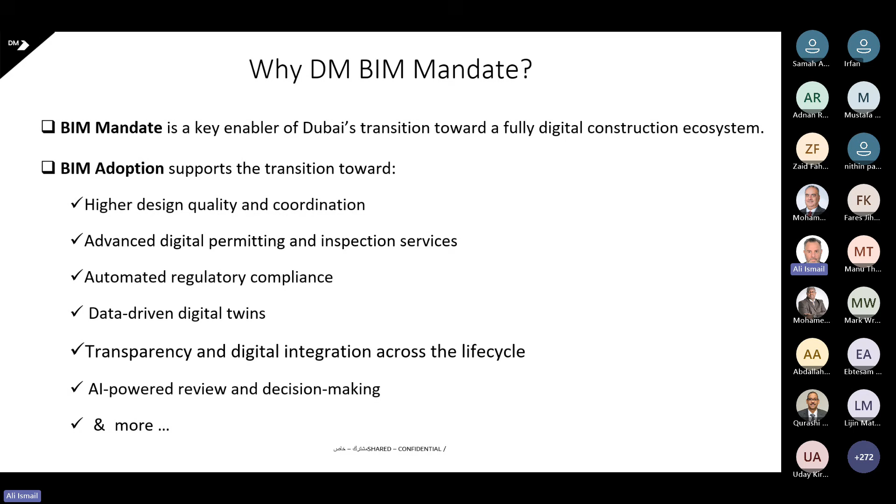And for sure, BIM and working with digital models improve transparency, especially if you are working with open BIM where there's no lock-in for the data, and digital integration in general across the whole life cycle of the project. AI needs good structured data, and to use AI to its maximum potential, BIM with structured data models compliant with BIM standards will feed any AI application in the future and improve our services more and more.

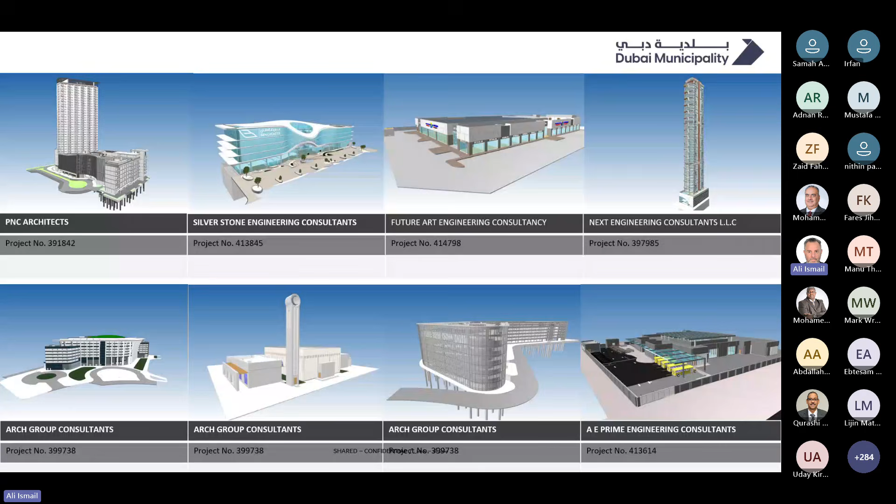So this is another screenshot of a real project submitted to Dubai Municipality, not just a sample model. We thank all the consultants whose names show on the screen for submitting successfully to Dubai Municipality.

So this was the first part from my side. Now I would like to hand over to Engineer Hadil or Engineer Sireen to talk more about the Dubai Municipality mandate and the permitting process. Engineers, let me know if you need to share from your side, or I can change the slide from mine.

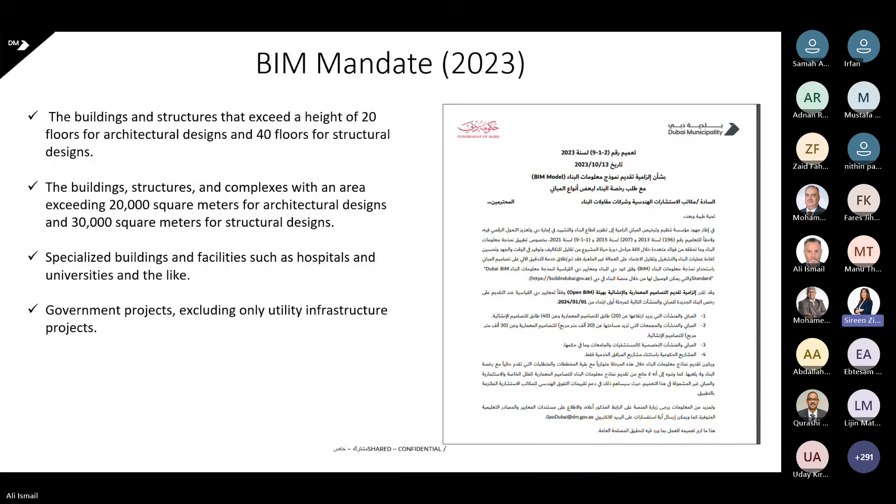Second one is buildings and structures with an area exceeding 20,000 square meters for architectural designs and 30,000 for structural designs. Specialized buildings like schools, shopping malls, hospitals, etc. And government projects, excluding only utility infrastructure projects like substations, these kinds of buildings. Can you move, Dr. Ali, please?

Now, 2 years later, after the BIM mandate has been applied, the second mandate came into being at the beginning of 2026. I'm going to explain what's new about this mandate. The first mandate was merely for new buildings; it did not cover modification applications. Now, this new one, we have made some modifications.

For new buildings, facilities and complexes higher than ground plus 12 floors, the mandate is now applied. It was ground plus 20, now it's becoming ground plus 12. And as far as area is concerned, previously it was above 20,000 square meters, now it's above 15,000 square meters. That is for new buildings.

Now for additions and major modifications, which applies only to BIM permitted buildings - if your building is not BIM permitted, this will not cover it. If it is a BIM permitted building, then if you do any modification from these 5 categories: adding or removing floors, increasing area by 1,500 square meters or more, complete design change, change of main building usage, and change of building location within the plot - then you have to submit the updated BIM model.

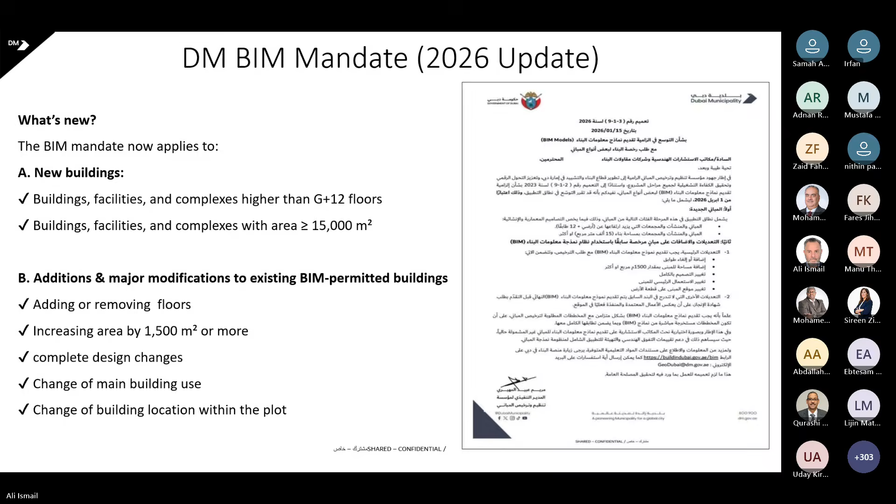Dr. Ali, can we proceed? Now let's talk about your submissions. Once you submit your application, we'll see what the permitting process under the BIM mandate is and how it will work. Your 2D drawings will have no requirement change - you will still submit them as before, but your drawings must be consistent with the submitted BIM models. Once the application is submitted, the building permit system will automatically identify and require BIM model submission for these cases.

The ones I mentioned previously, which are for final new buildings - I'll repeat again: buildings higher than ground plus 12 floors, area more than 15,000 square meters, and governmental and specialized buildings. For major modifications, also for BIM permitted buildings, it will include adding or removing floors, increasing area by 1,500 square meters or more, complete design change, change of building main use, or changing the building location.

I hope you hear me better. Can you hear me well? Yes, I can hear you. Because some consultants mentioned that they cannot hear me. Maybe there are some noises, but it's okay.

Okay, for other modifications - let's say you got a building permit, a BIM permitted application, and now you will do some modification like structural modification, for instance. The system will not require your BIM model submission once you submit, but it will automatically create a condition to submit the final updated BIM model before the completion certificate. So after you take the final building as a BIM permit, maybe you will submit many modifications not listed under the 5 categories, like structural or mechanical modification - the system will not ask you to submit the BIM model for this.

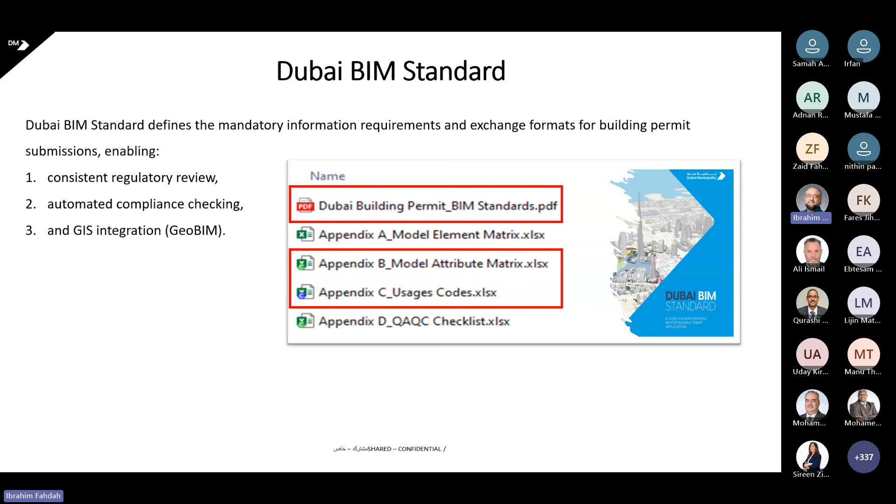So the key two appendices that you should refer to whenever you're working on submission are B and C. Keep this in mind when you're working on submission. I'll talk a bit more in detail about what these appendices are.

The master file, as I said, is the key document that you need to go through before you start working on any submission. It's made of two parts. Part one is a general introduction—what is the standard, why the standard is needed. The second part is the technical part.

So if you skip part one, at least you must go through part two, which covers the exchange information requirements—this is the technical part. It talks about the file format, the file size, the naming convention, etc. This part lays out the exchange information requirements and also refers to some supporting documents. So this is the master file to start with when you're reading or learning about the standard.

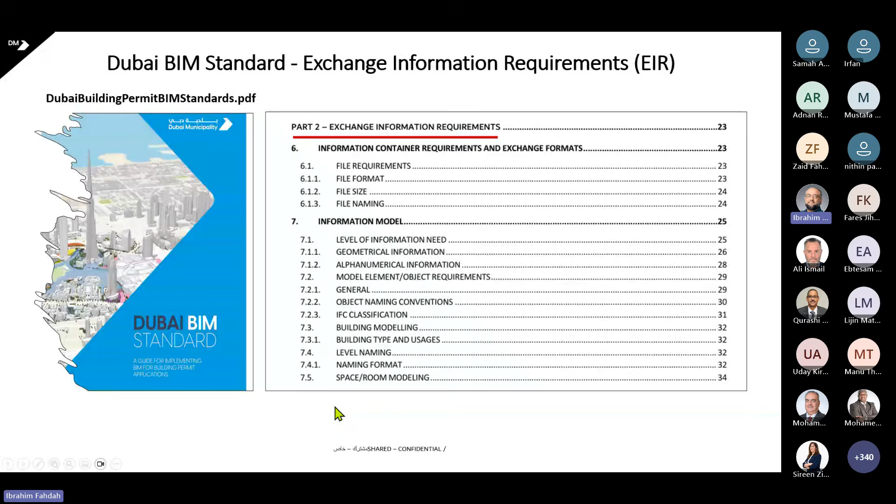Beside these master files, there are appendices from A to D, but in reality we find that most consultants work closely with Appendix B and C, because these two appendices define the information requirements. Both of them are Excel sheets.

Beside these elements—the list of elements—under each sheet or each element, we have a list of attributes or properties that should be included in the model. So whenever you're creating your BIM model, you need to fill in these details.

Now, we have Appendix C. It's complementary and mainly defines usage codes. Because when you create your model, the spaces, you need to specify usages, right? For building units and spaces.

For this, you can of course put plain English, but the machine doesn't like plain English because you can have a typo, or upper and lower case letters. This is why we have Appendix C that defines the codes—very strict codes to use for usages, building units and spaces. So whenever you want to define usages, you need to refer to Appendix C.

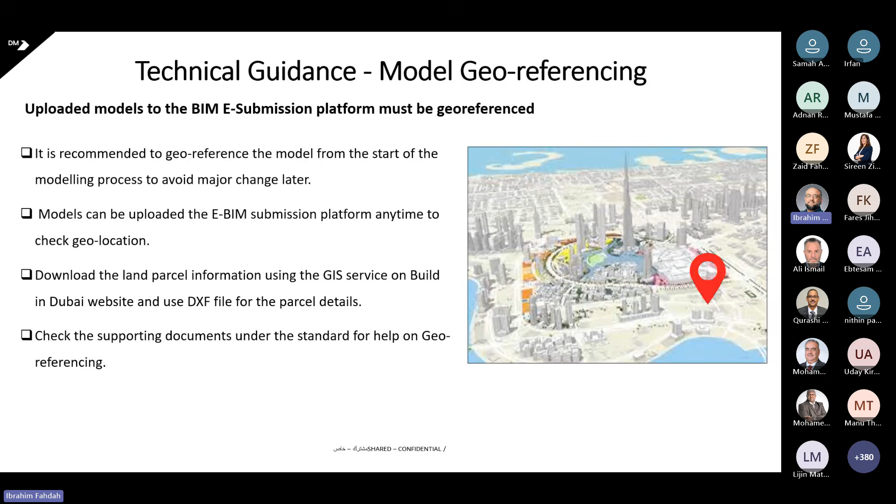Let's say you finish the steps and want to make sure it's okay. You can upload the model. If you export IFC, even if it's not complete yet and you haven't done any real modeling, you can upload the model as is to the eBIM platform, the Dubai platform, and check if the model is located within the boundary of your parcel ID or parcel boundary. This will assure you that your geolocation is correct.

Now let's say you've geolocated the model and you're okay. The modeling process starts. We know that a BIM model is not just geometry - it's geometry plus alphanumerical information. So I'll cover the two sides of requirements: the geometry side first, followed by the information requirements.

There are certain modeling styles not acceptable for submission. The most recommended practices for Dubai Municipality submission are largely based on universal recommendations. For example, you cannot have a wall from start to top as one piece - that's a quick example of recommended practices.

Ideally, you should follow the recommended modeling practices for geometrical features in the model. There are reasons behind this - following these steps makes life easier at our end and easier for the machine. It ensures better visualization; we can, for example, view the model story by story. It helps in the automation process, validation, and checking rules against the Dubai Building Code, and makes life easier for the engineers who review your model.

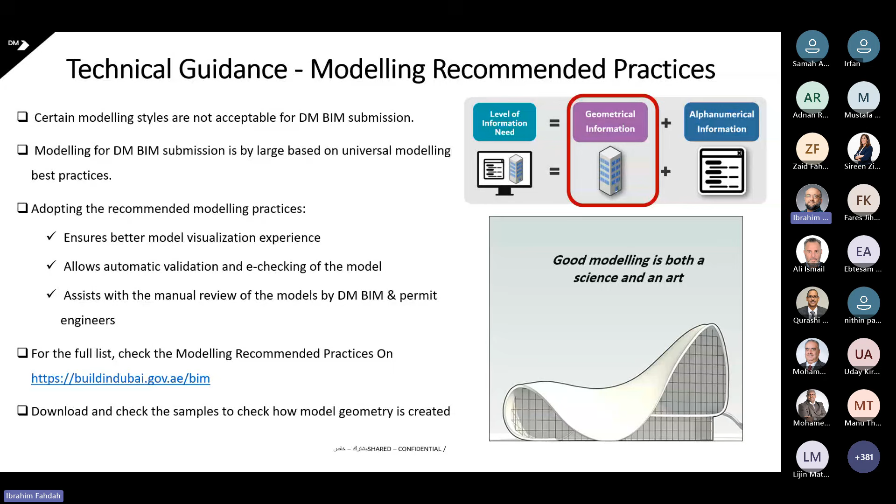These recommended practices are also documented in a file. You can find them on the Build in Dubai website, under /BIM, if you want to know the full list.

Just a quick example of these practices: like on the screen, you see a column on the left side modeled from bottom to top as one piece - that's refused, not accepted modeling. The right way is to model level by level. Again, this is like international universal recommended practice.

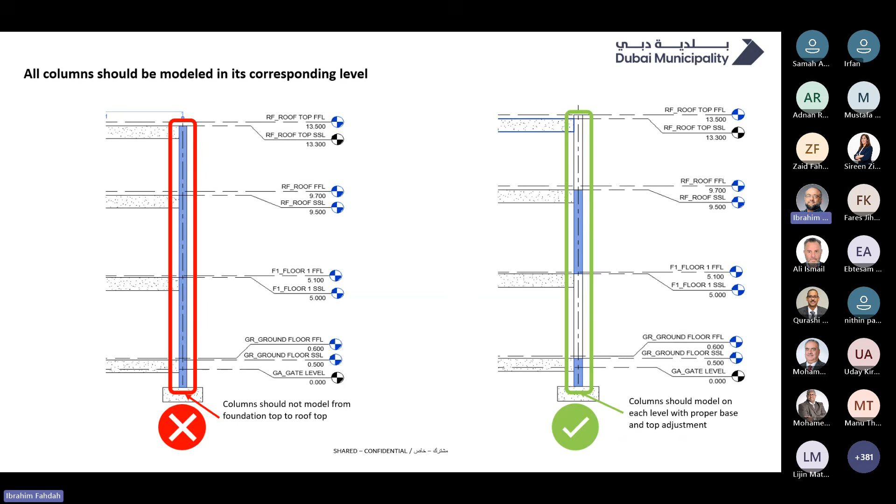Another example is the wall - if you see on the left side, it intersects with the slab. That is not accepted; ideally it's recommended to have it as on the right, from slab top to slab bottom. So that's how it should be, level by level.

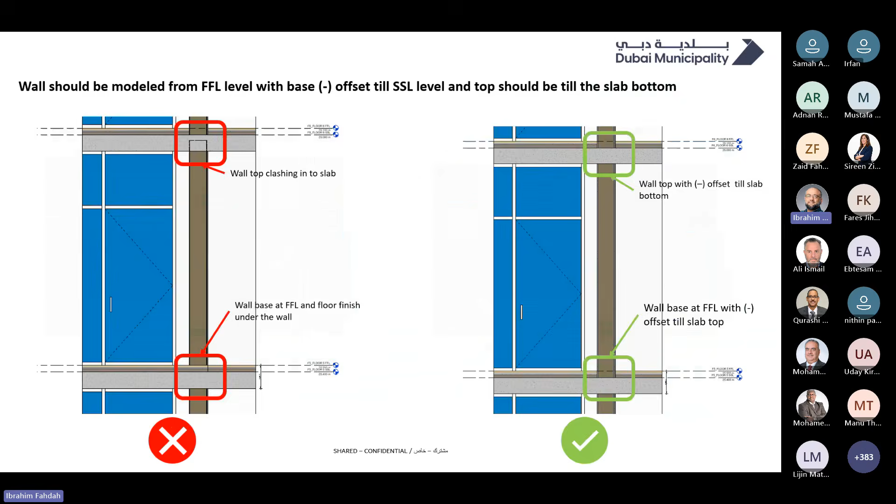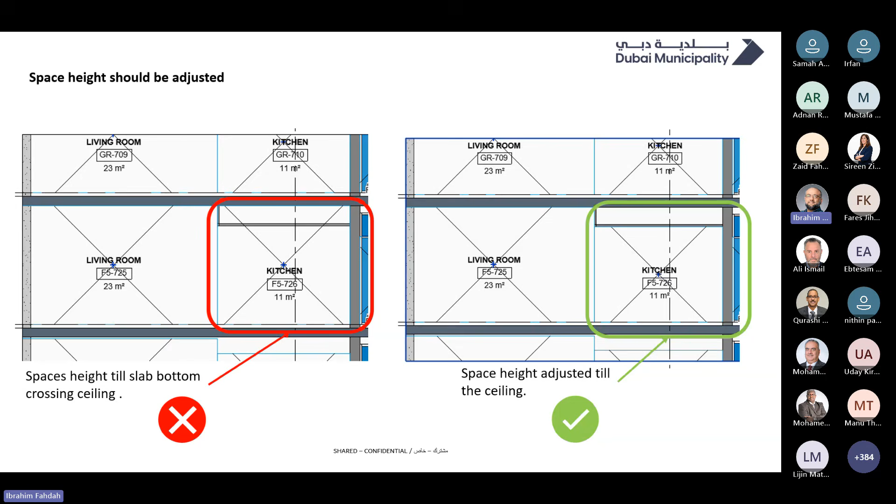For space height, for example, if you see on the left side, we have the space height crossing the ceiling - that's wrong modeling, it doesn't give the right height. But on the right side, we have the height modeled correctly under the ceiling. So that's the geometric modeling information - we recommend you follow these steps.

Now the second part of modeling that many consultants aren't used to is filling in information for their geometrical elements. We know that a BIM model is not just a 3D model. For that reason, there is a second requirement from the BIM standard, which is alphanumerical information - information that we add to the geometric elements or BIM elements.

What is required, you can find in Appendix B - what elements you need to supply information for and what information attributes and properties you need to supply all exists in Appendix B. So you can always consult that appendix, and as I said, you need to fill in the details for key elements like spaces, slabs, walls, etc.

Now, I already said why we need information - whenever you add information to the BIM model, that enriches it to support many use cases for automation, like generating building cards, working out total build-up area, total parking slots, etc. It also helps in checking space rules from Dubai Building Code - based on the space usage you tell us about using usage codes, we can identify what a space is used for, and automatically check the rules. When I say 'we,' I mean the machine automatically checking these rules. We can also cross-reference against some of your manual inputs in the system.

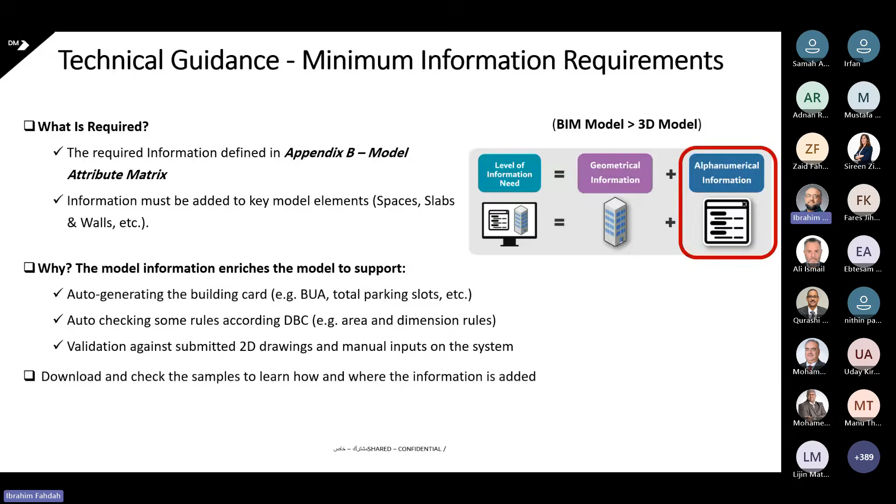So now let's say you've done your modeling, geometry okay, information okay, and now you have a large model. We know some projects are very complex, made of multiple buildings, and some buildings are made of multiple parts. For this reason, you don't have to worry - you can split your models into multiple IFC files. The naming convention is provided for you if you submit multiple files, so there's no problem with that.

But you need to keep a few things in mind. All submissions have to be in a single zip file containing all the IFC files. No mixing elements between files - architectural files should include only architectural elements, structural only structural elements. No duplicates. Each IFC file should belong to a building or part of a building. For example, a building with 3 parts could be 3 IFC files for each discipline, so in total maybe 6.

Cladding and landscape - because it's complex to split by story - we allow that to be in a single file. Finally, for naming convention, always refer to the documentation for the correct naming convention if you submit multiple files. So there's no problem with splitting your model if you have a large project.

Now, saying everything is okay so far, the last step is the IFC export. This should be completed correctly. Many consultants, in the early days of BIM submission, just submitted any IFC file. We recommend you read the documentation and follow the standard, correct process to submit the IFC file - using IFC 4 format, following the steps in the documentation.

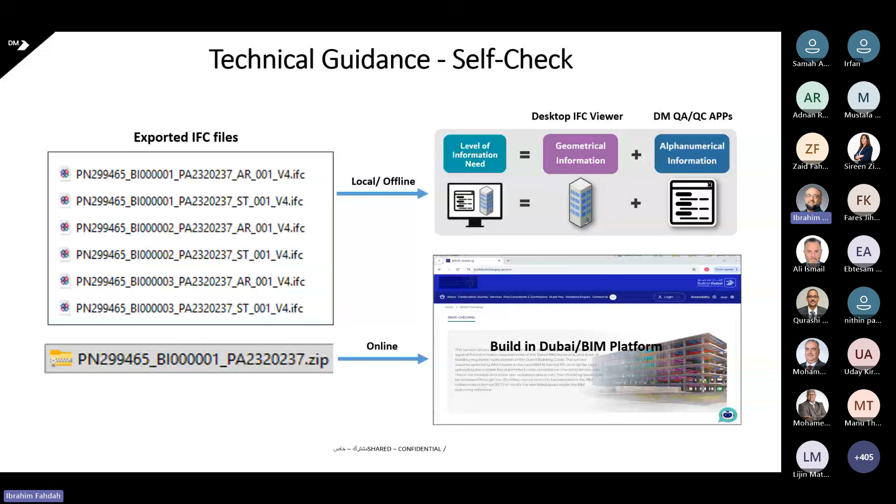Wrapping up my part now, assuming many attendees today may eventually need to submit under the new updated mandate. For this, we put together an action plan of things you need to do to meet the requirements.

First, understand the scope of the mandate and the process, download the standard and the sample, and get familiar with this material. It's not that complex once you know the requirements. Build some understanding of the IFC file, what IFC is, and there's plenty of material online about how to work with it in your BIM authoring tools. Learn about the recommended practices for modeling, and keep in mind adding information to the model.

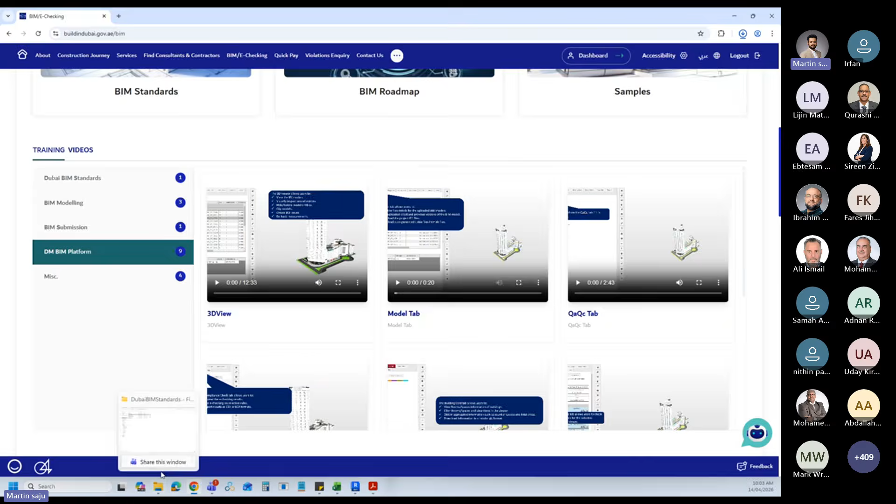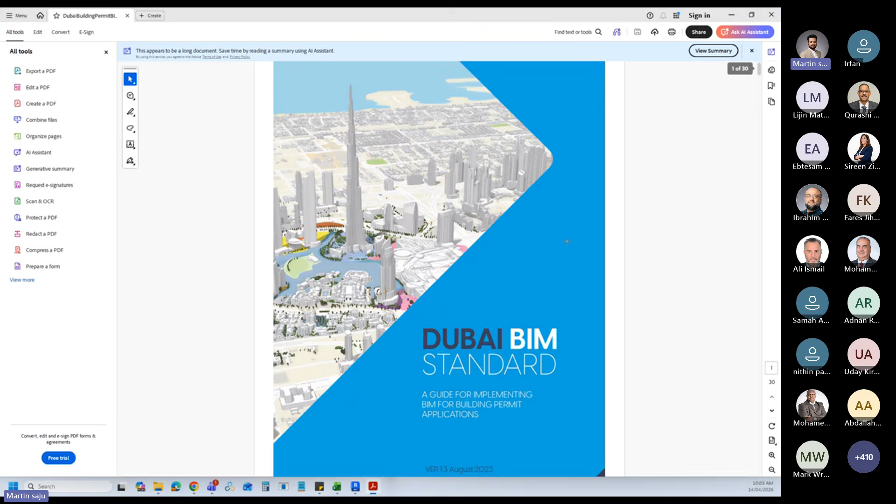If I unzip it, you'll see a couple of subfolders and PDF documents. If we go to the BIM standard folder and open this PDF file, this is the one Dr. Ibrahim was sharing earlier in his session. This document is basically a guideline for implementing BIM for your building permit application. As he said, it has two parts: Part one explains the basics about BIM, its terminologies and other information as per ISO 19650.

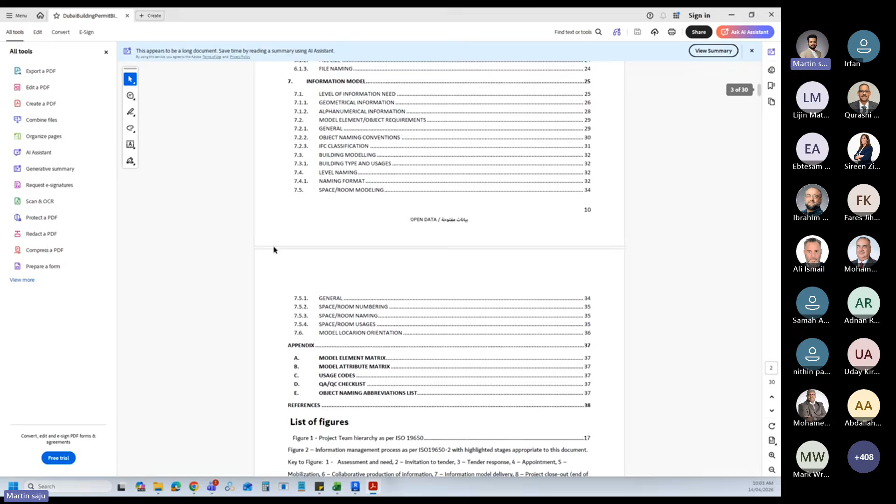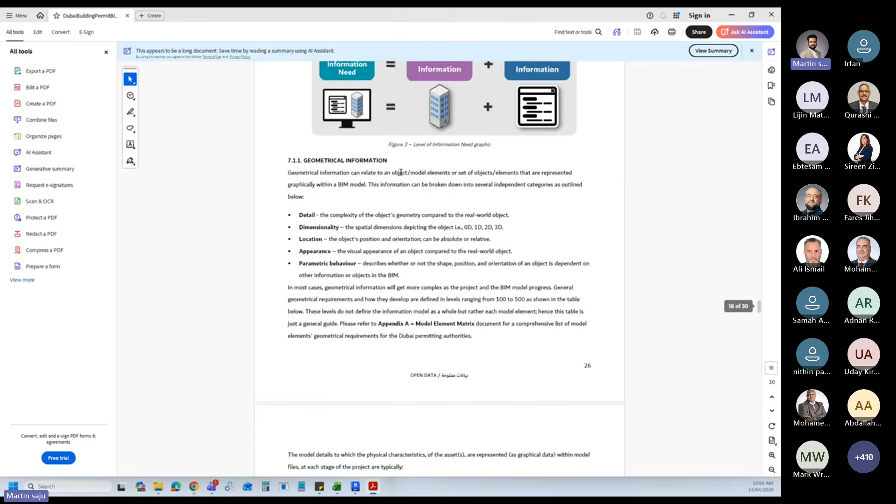What's important for us is part two. It explains the different information requirements - the file formats, file size, file naming you need to follow, and the level of information required, which includes, as Dr. Ibrahim mentioned, geometrical and alphanumerical information. Going through this document, you'll understand what information is required, what level of detail is needed, and what parameters or other data you need to refer to for a successful DM submission.

In the submission, something really important is the IFC classification. Every model element in your IFC file needs to be mapped to a proper IFC class, with the proper predefined type and an object type override if applicable. This information is available in Appendix B, which is also inside the BIM standard folder.

If I open my Appendix B, this is how it looks. It has a lot of attributes required for every IFC class. As I mentioned, every model element needs to be mapped to a proper IFC class. For example, your door, when modeled, is mapped to an IFC door category. Your parking is mapped to IFC space with predefined type parking.

And if you look at an example of rooms, rooms are exported as IFC spaces. Okay, and these are the lists. So there are a lot of other tabs here in this particular Excel file.

You can download and refer to this Appendix B model attribute matrix. So if you refer, for example, I'm taking the reference of rooms. Can you maximize the window, the Excel window, please? Thank you. Yes, so rooms are exported as IFC.

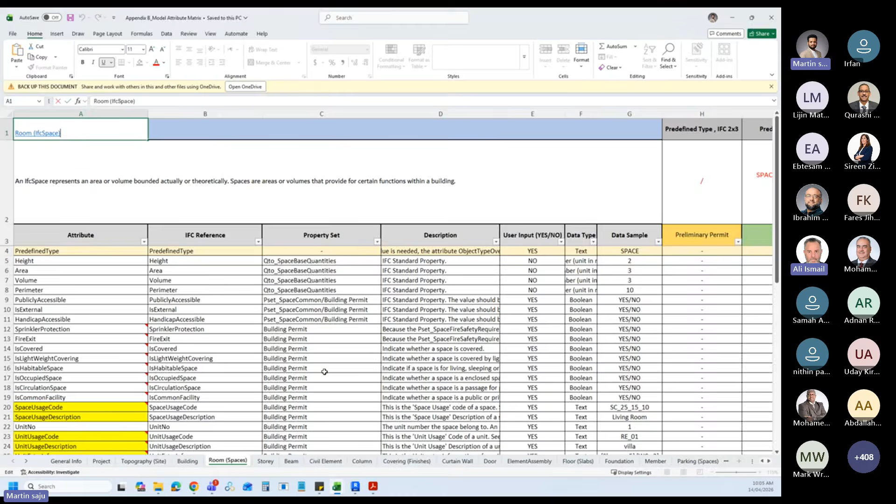Just to increase the font a little bit to make it more readable. Thank you. So rooms are exported as IFC spaces, and these are all the attributes that require information or data when you are working with rooms.

So when you scroll down, you will notice something called codes and descriptions. This was mentioned earlier. These are the codes which have been developed with local codes to identify the type of the building, the usage of the building, and the usage of the various rooms that you provide. So this data about the codes is available in Appendix C, which is also available inside the BIM standards folder.

So if you see this one, Appendix C usage codes. So if you open Appendix C, it will look like this. It has multiple sheets, multiple tabs, and it has the list of all the information, all the codes that is required for the building usages and also the space usages.

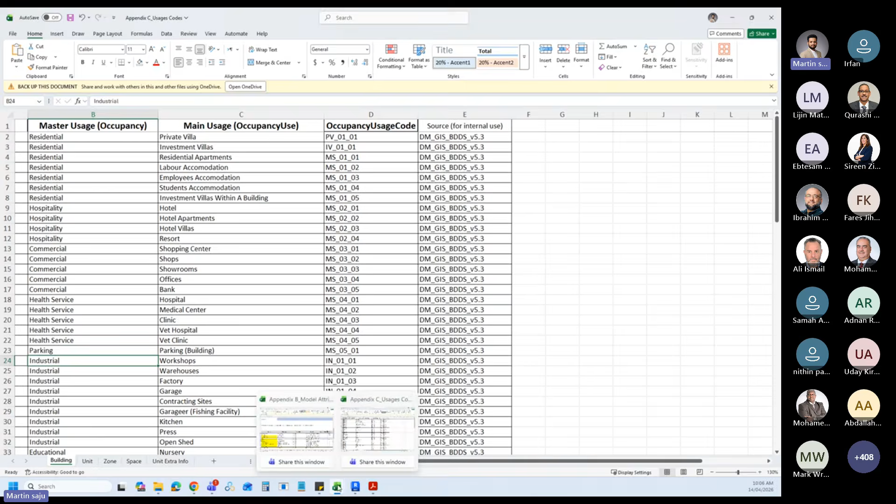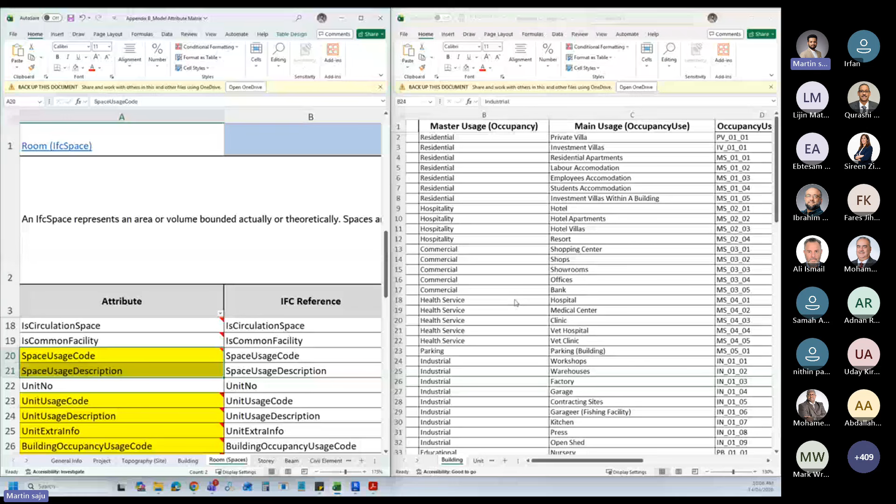If I may open my Appendix B and Appendix C side by side, I assume the font is still fine. So here, this one is the space usage code. And if you want to get an idea about the space usage code, you need to come to your Appendix C and switch to the spaces sheet. Then you will see this one is your space usage description and this one is your space usage code.

Also, if you scroll down in your Appendix B, I'm at my Appendix B right now, you will see there's something called the unit usage code and unit usage description, additionally building usage code and description. So if you want information about units, you switch to your unit sheet and you could find your unit usage code and your unit usage description in Appendix C.

Same is the case for building occupancy usage and zone. You have a tab here for zone where you get the information for your zone object type and also for your zone code. So this is a basic understanding about Appendix B and Appendix C. I will show you in detail how these appendices work.

Okay, so now I've been mentioning different parameters or different attributes that need to be filled with information. So, Engineer Martin, if you allow me, just to ask for a favor for our consultants.

As you know, it is very difficult to build a comprehensive and complete classification for all kinds of space usages or zones. We are doing our best to extend this list to be more comprehensive. For example, if we are talking about schools, we don't have at the moment very specific usages like principal room or music room, etc. So that's why you have to find a higher level.

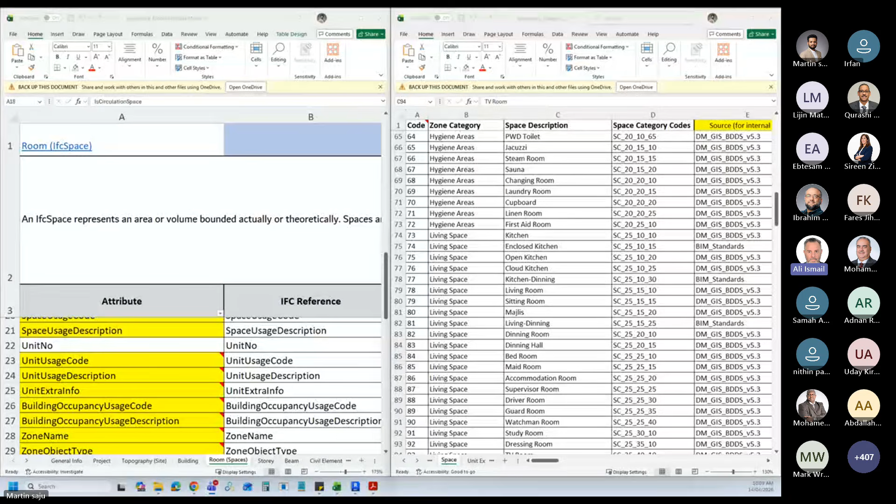Continue. Okay, so now we covered the important documents inside the BIM standard folder, which was this BIM standard PDF document and also Appendix B and Appendix C.

Now going back, you will be able to see another folder that says template guidelines, in which we have listed a couple of commonly used BIM authoring softwares. So for the time being, we are going to refer to the Revit BIM authoring software. So if you go to the Revit folder, you could see your Revit template. I saw a couple of messages in the chat asking for the template.

You can get the Revit template from this folder. Please note the Revit template developed by DM is currently in version 2019. So if any consultants are working in a higher version, you can easily upgrade this template and then continue working on it.

If your company already has an existing template, it is not mandatory that you use the DM standard template. You can use your own, which is completely fine, but you need to make sure you load this set of shared parameters. This is the shared parameter document we mentioned earlier. You need to load the shared parameters and make sure all the values are filled into all of the parameters.

Let me open the template. I have opened a sample file, and this is the landing page of the template. This sample file has been worked out in the DM template itself. Please note the sample files are in Revit version 2024, so if any consultants try to refer to the sample files in a lower version, it will be a little difficult. This is currently version 2024, and I'm opening a mixed use residential project as an example.

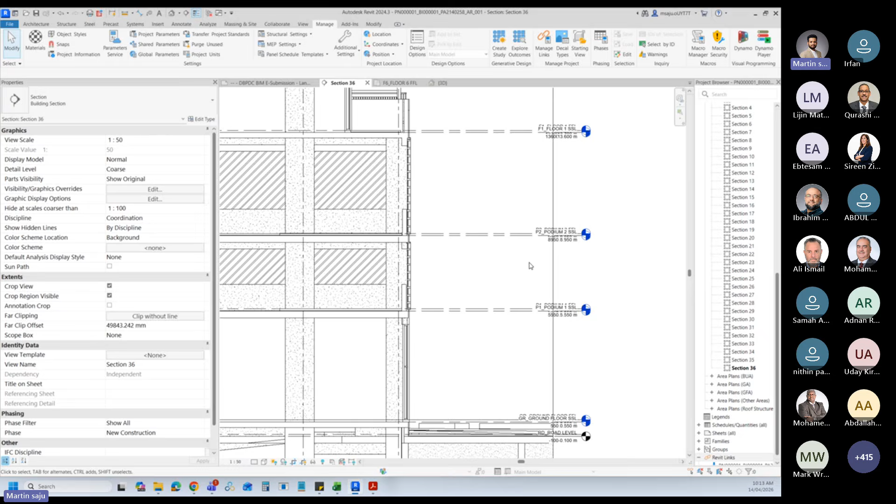Once you set up your levels with the correct naming convention, make sure they are correct. In case you need to provide a reference level or a dummy level for the sake of submission or to finish your modeling properly, you can absolutely use it, but make sure that you do not export your dummy level.

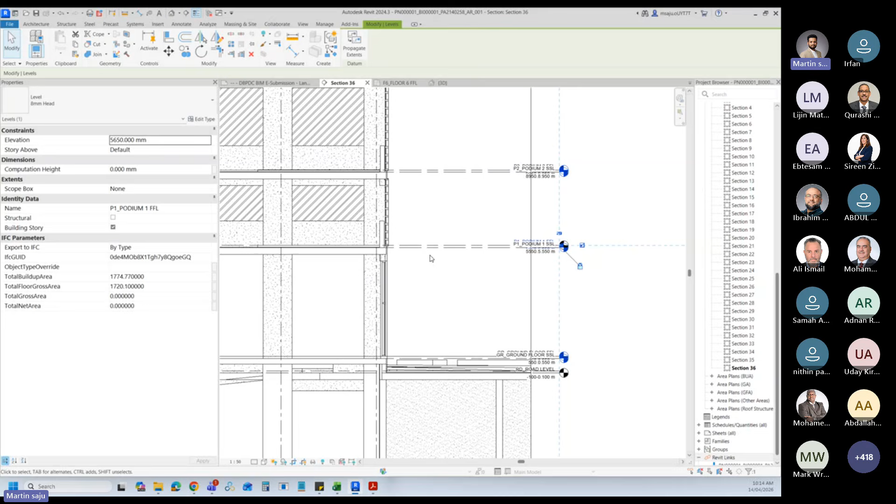What you can do is select your level, and there is a parameter called building story. Make sure you check off this checkbox so that this particular level is not exported. Since this is my architectural file, I don't need this level, so I check it off. No need to worry that the elements hosted to this level will be deleted or not exported — that is not the case. It will definitely be exported, but hosted to the level below it. That is something we need to make sure about the level naming convention.

So moving forward, once we are good with our levels, what we need to make sure is we set up the geolocation.

Setting up a file with the correct real world coordinates is really important. You need to make sure that your easting, northing, and elevation values are in the correct coordinates.

Imagine if you have different disciplines involved, like architecture, structure, ID, facade, and landscape, working in different Revit models. Please make sure all disciplines share the same shared coordinates. Also, regarding the gate level I mentioned earlier, please make sure there is a DMD value, like 00, for your gate level, and it should be equal to your DMD value. All disciplines or files need to follow the same DMD values.

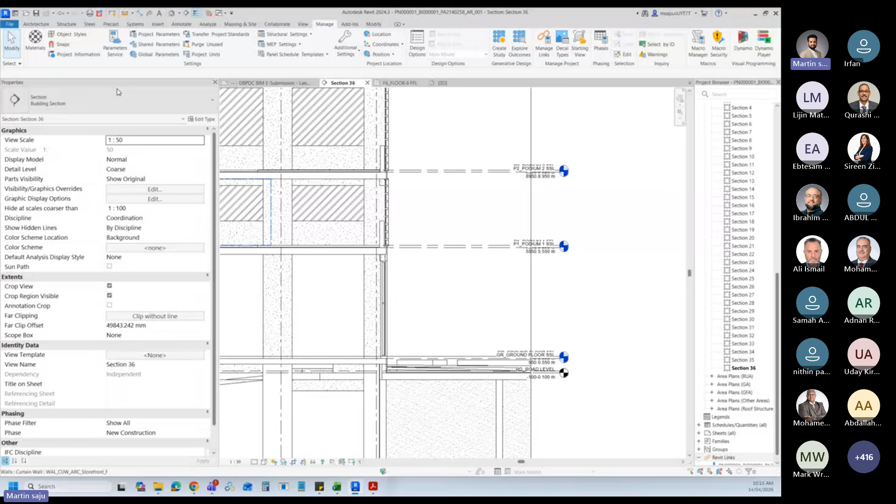Once we are good with all of this, we can start filling the information for our project, starting with the project information. I won't go deep into all the parameters, just a few that need to be highlighted. Let me open my Appendix C, which is a code, and look at occupancy usage code and occupancy use.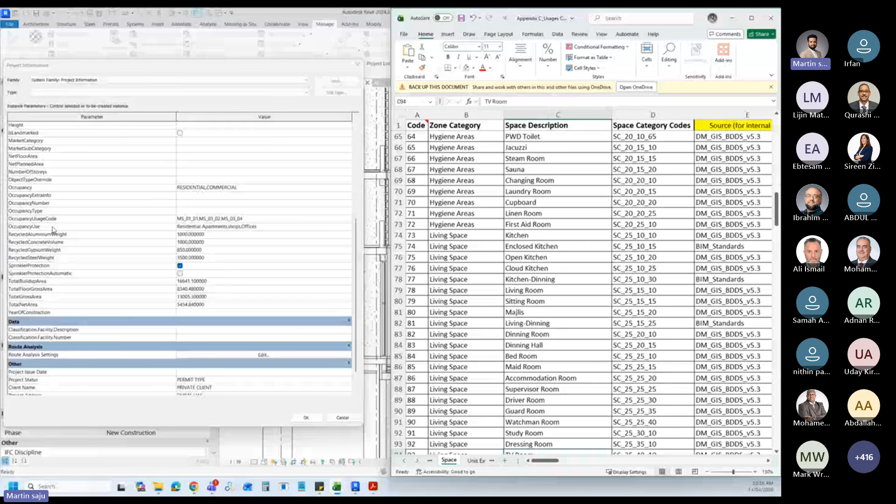For occupancy usage, you can switch to your buildings tab. Currently what I have opened is a mixed use residential project, so I have residential as well as commercial. My occupancy is residential and commercial, so you can mention both with a comma separator.

For the occupancy usage code, mine is a residential apartment, and this is my occupancy usage code. In commercial, I have shops and offices in this particular project, so I will mention residential apartments, comma shops, comma offices, with the same codes MS0101, MS0302, and 0304 mentioned in commas.

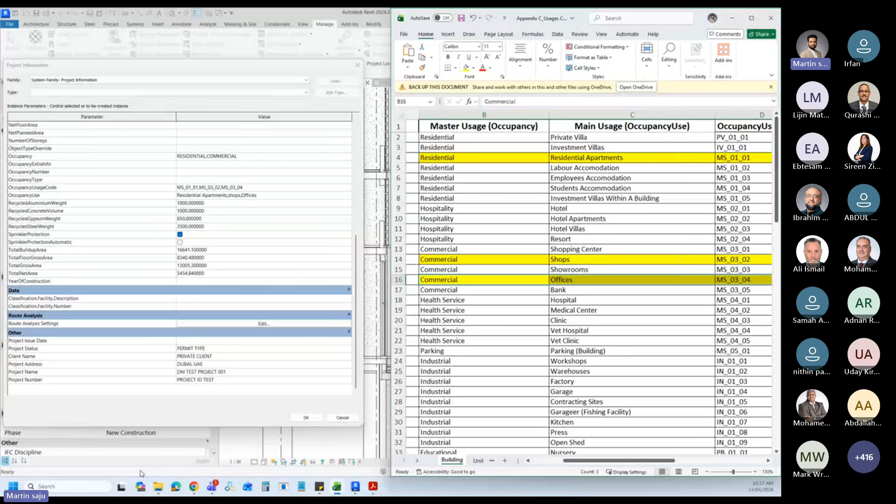It's really important that you fill the codes exactly like what we have in Appendix C into the project information. We also have a lot of other parameters to fill in, which you can easily identify by referring to Appendix B, the project tab, your site, and your building. These parameters go into your project information.

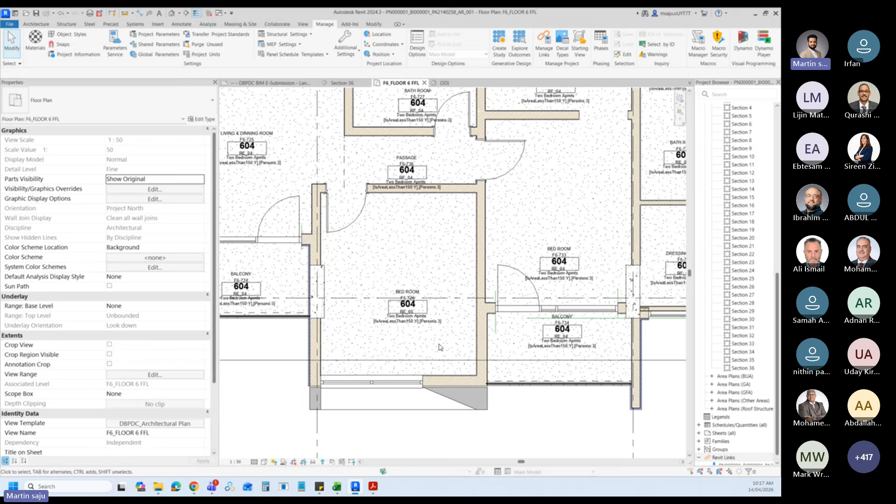Once we are good with the project information, next, for example, I'll only show one floor plan with filling the information for a space. You need to make sure you fill the IFC parameters for all model elements like walls, doors, windows, floors, beams, and everything. For instance, I'm taking the example of a room.

If I take this room, on the property palette you will be able to see, under identity data, the name of the room is as per the design intent. You can provide the name as per your design intent, which is absolutely fine, whether it be bedroom 1, bedroom 2, 3, 4, whatever it is.

We mentioned earlier that every model element needs to be exported to a particular IFC class. I mentioned rooms are exported as IFC spaces. So under export to IFC as, hit the three dots, and you'll get the IFC options. Search for space, select IFC space, the predefined type is space, hit OK, and then this part is done.

Then there's the building occupancy usage code and building occupancy usage description, which you can find in Appendix C that we discussed earlier. This room is currently part of my residential apartment, so I've used the code for residential apartment here. If this was an office, you should use the code for office, or if it was a retail, use the code for a shop.

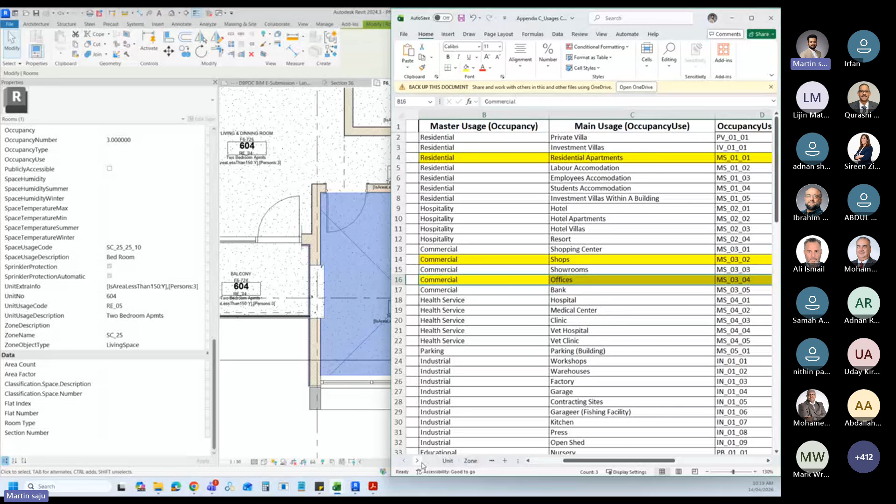And then if you scroll down, we have a set of codes for which you need to refer to your Appendix C. So if I go to Spaces Excel, this one is my Appendix C on my right side, and I have my parameter on my left side. So here first I need to fill the information regarding spaces.

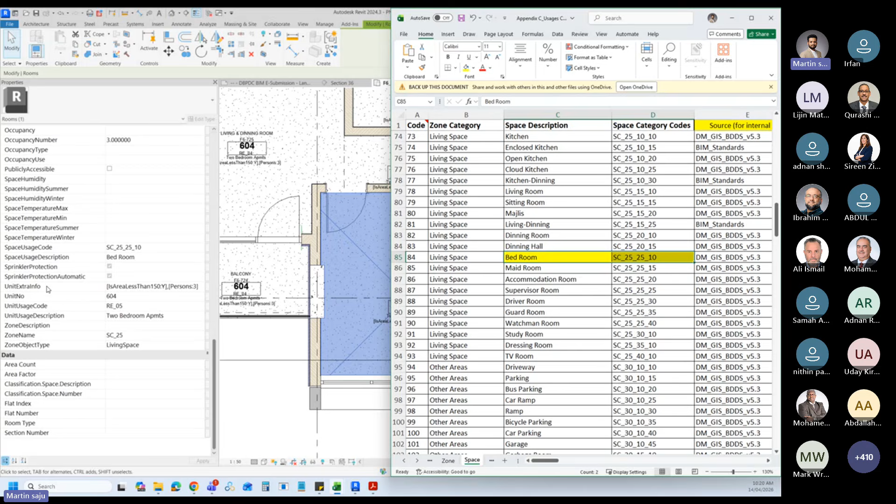So first one is my space usage code and description, which you can find here. Since it's a bedroom, it will be part of my living space. And if I check, this one is my code. So the description is bedroom, and this is my code, SC_25_25_10.

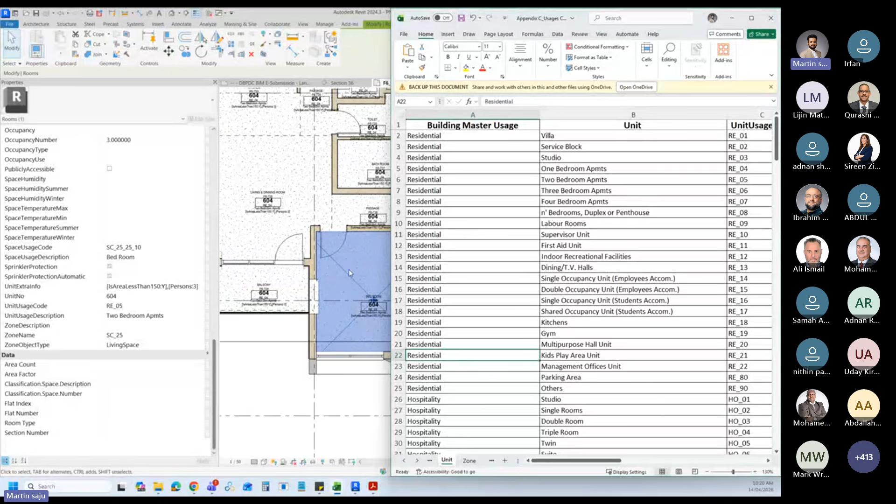Likewise, you need to fill the information for your unit, which is available in the unit sheet in Appendix C, which is this one. So while filling the units, you need to make sure that all of these are the different unit usages that we have mentioned in Appendix. So any of these comes in your project, you need to fill it. For instance, this one that I have selected right now, this room belongs to a 2-bedroom apartment. So this one is my unit usage. This is my unit usage code, and this is my unit usage extra info.

So if you see, just copy this one, 2-bedroom apartment, paste it here. Now the unit usage code is RE_05, paste it here. Okay, and that is how we fill the unit information.

So imagine it's not only for the apartment units. This one, you see the unit number - this is as per the design intent. So this one means it's the 4th apartment on the 6th floor, that's 604. Okay, so likewise, you need to provide unit information for all of the other units.

Like say, for example, if you have shops, if you have offices, if you have amenities, your amenities also need to provide units. For example, if you see here, you have a gym. If you have a gym, you need to provide unit information for your gym as well, your kids play area. And if you have any other rooms, you need to provide unit information for all of your units that you are providing in your project.

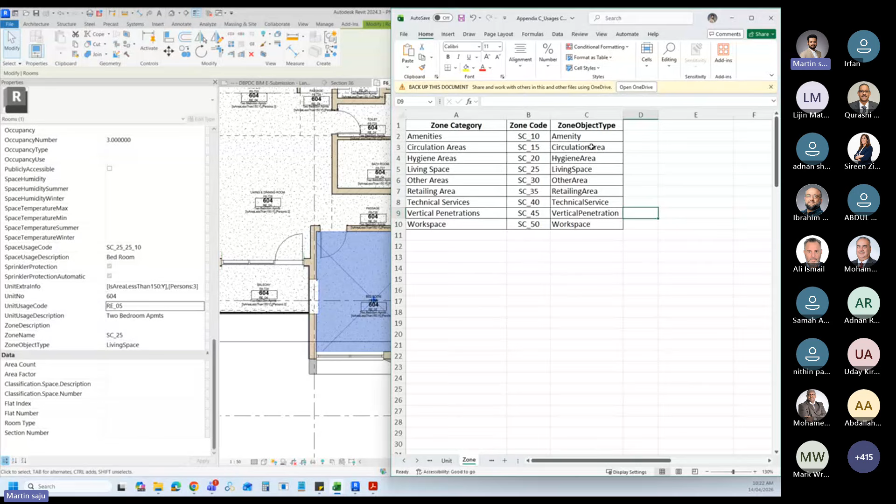Okay, then the zone is also the same way. You need to fill the information for your zone. If you switch to your zone tab, you could see the zone object type and also the zone code. So that is how we fill the information referring to Appendix C. And what information or what attributes need to be filled, you can refer to Appendix B. If you still need clarity, you can refer to the sample file that we have already worked out for understanding.

Okay, now once we are all good with the modeling - now I show only the example for the spaces. Like I mentioned earlier, you need to make sure that you fill all the attributes for all the model elements. Okay, so now when we are going to export, we are good to export now.

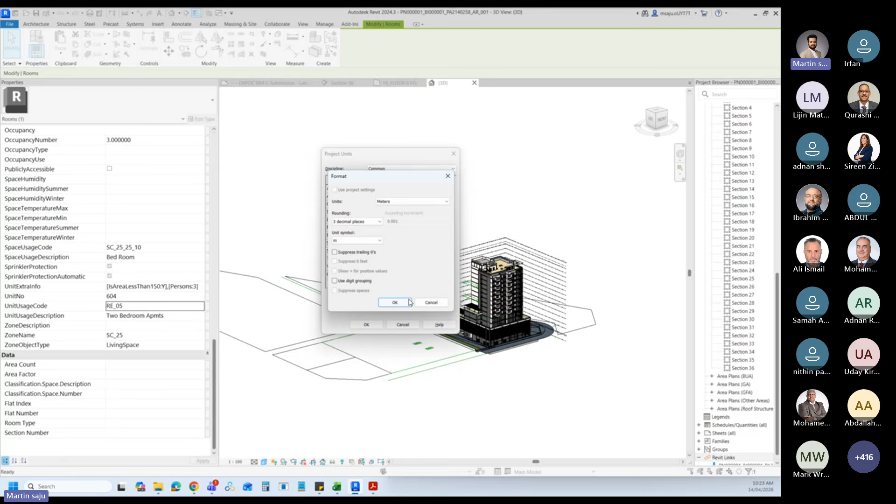I select a 3D view, and maybe you can set up a 3D view for export, which is up to you or as per your company policies or standards. Now, before you export your file to IFC, you need to make sure of one thing, that all the files need to be exported in unit meters. So before export, double check that your units is in meters every time. If it is not in meters, when you try to upload your IFC to the portal, it will show as fail. Okay, so always make sure that you're exporting in the unit meters.

So go to files, go to export, and if you scroll down, there is something called IFC options. So basically, we have already a set of parameters and we need to do a proper mapping of the parameters. So if you hit load under the template option, template folder itself, you could find this thing called IFC parameter mapping. Select this one, open, and then it will decide what needs to be exported and what need not to be exported. Okay, it will set by itself, so things will be easier for you.

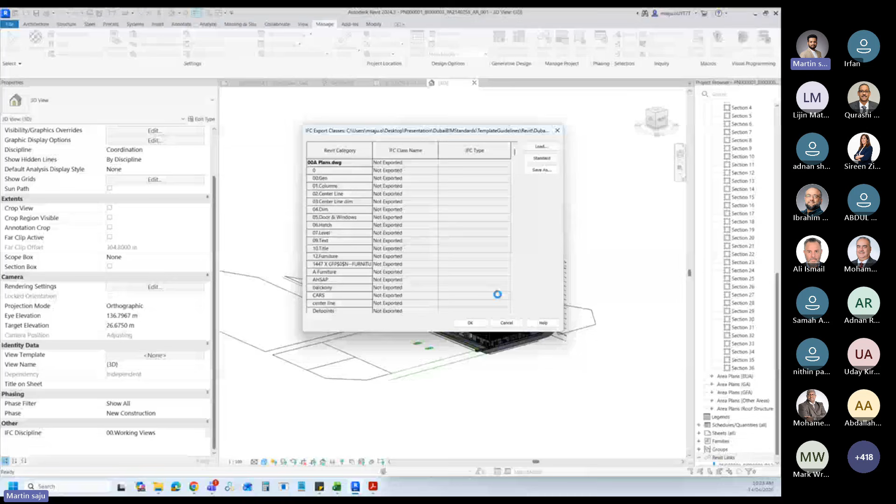Just hit OK and then go to export, then IFC, then modify setup. We already have a predefined modify setup you can use. It's already there in our template, and that's why we asked you to use a template in case you don't have one.

If you already have a template, you can export the setup from our template and import it into your project. Once this is selected, all of the settings will change by itself as per the DM requirement, and it should be in IFC 4. Please remember that.

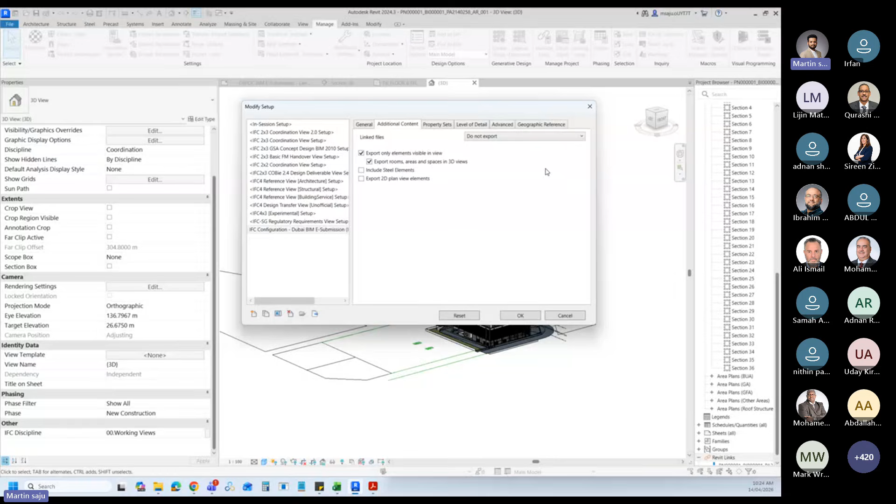One additional thing to highlight: if you are working with different linked files, imagine you're working in architecture with structure, facade, interior design all linked to your architecture, you should not link your linked Revit models into one IFC file. It should all be exported as individual separate IFCs.

Now coming to the property set, you need to load a property set, which is also available inside this template Revit folder. Select the property set and load it, then load the IFC parameter mapping. This will work properly for Revit 2025 and above, so you can directly load the parameter mapping from here.

And the level of detail is by default set to low, nothing to do with the advanced.

When we go to geographic reference, you need to set this to shared coordinates every time. If you are using a setup, it will be changed to shared coordinates by default, and do not override any values here. This is the relevance of why we asked you to make sure all your associated disciplines follow the same shared coordinate system.

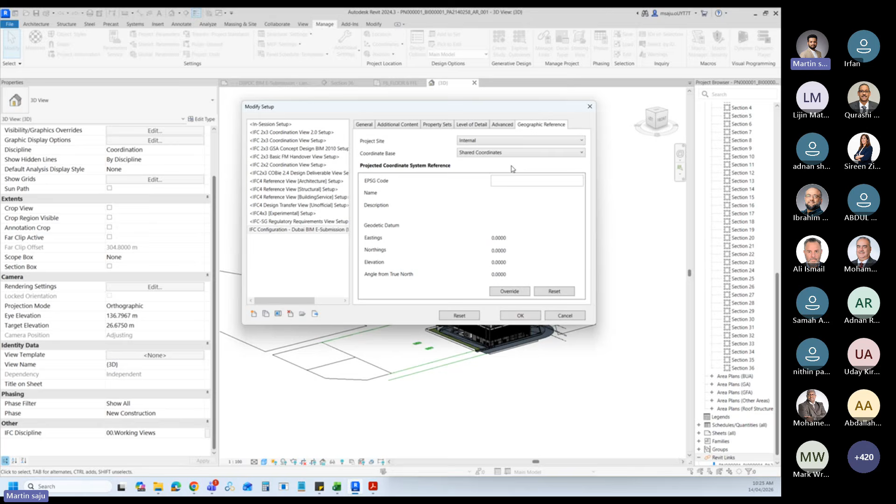If all of them are in the correct shared coordinates, then all the files will sit correctly when you open them in your IFC viewer. Also, exporting in the correct coordinates is important because it is required for model integration with the Dubai GIS database.

Once we are all good with this, hit OK, and then we are good to export. You will get your IFC export file, and the export time will depend on the size of your project. If your project has a lot of geometry and the file size is too much, it will take too much time for export. Be patient, and you will definitely get your export file.

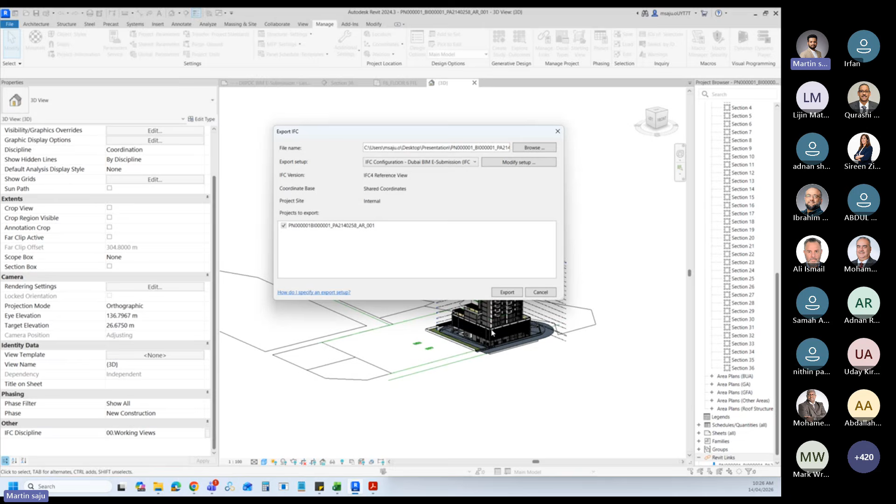Now you have your export, and engineer Arun will explain how to do the self-check and the QAQC for the export you have in hand. Thank you all, over to you Arun.

Thank you Martin, and morning to all. I hope everyone is clear on how to get all the documents, how to update your model, the DM BIM standards, how to export it. Now what I'm going to show, I will share my screen first.

So these are the exported IFC files. Now I'm going to show how you can self-check your model, the IFC files. Always before you submit the DWF or PDF exported from CAD or any other software, you will have an internal review before submission, right? You check whether the tags are there, whether the hatches are there, line weight and all those things on the 2D drawings, using DWF, Autodesk Viewer, or other viewers to check those.

So for reviewing the IFC files, you need some software like IFC viewers. In the market, there are quite a lot of IFC viewers available. In DM, we are using a software called BIMcollab. So let me open it.

So I have loaded those two models here, both the structural and architectural disciplines. Let me go through BIMcollab. It has file views and isolation, show, scaling and searching, all these tabs here. Here you can see the loaded files, architectural and structural disciplines are here. And here is the property table — if you select any element, it will show you the properties of that element.

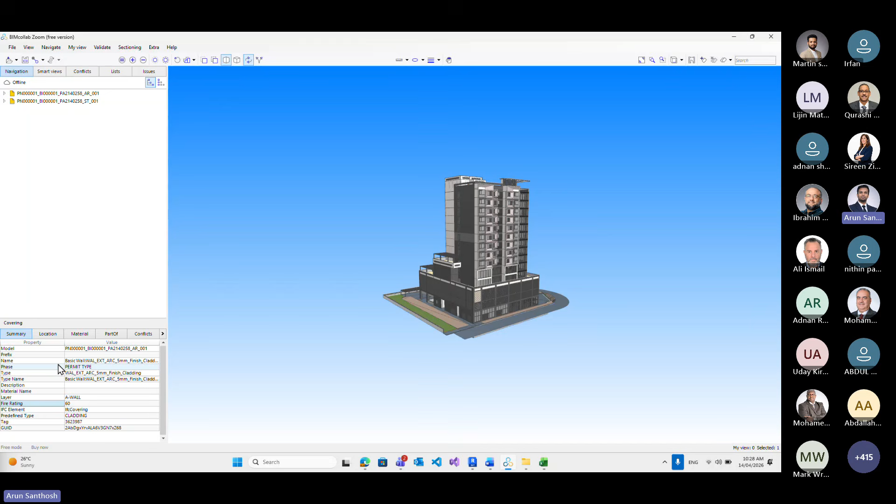So for the visualization, I will go step by step. First, you have to check here. I will go first. Okay, so we'll expand this.

So this is an IFC file with the proper IFC structure as IFC project. If you open it, IFC site, IFC building, then building story. Inside each building story, you can see the elements associated with that level.

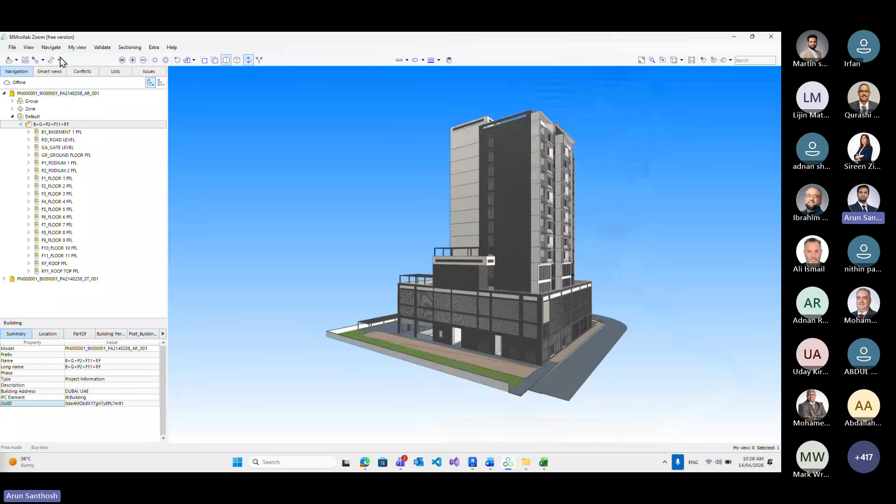So first you have to check whether the levels exported are correct. When Martin shows the Revit, as you can see here, in this file there are some dummy levels just for hosting purpose. For example, here there is a lift room level. But in the IFC file you don't see that, because that's not a building story.

So here, you should only export the building stories. For this building: basement, road level for hosting the road and external elements, gate level to host all the internal landscape and hardscape, and any car parking, all those things should be in gate level. Ground floor, then two podiums, then 11 floors, roof and top roof. So in both disciplines, architecture and structure, you should only export the building stories. That's the first requirement.

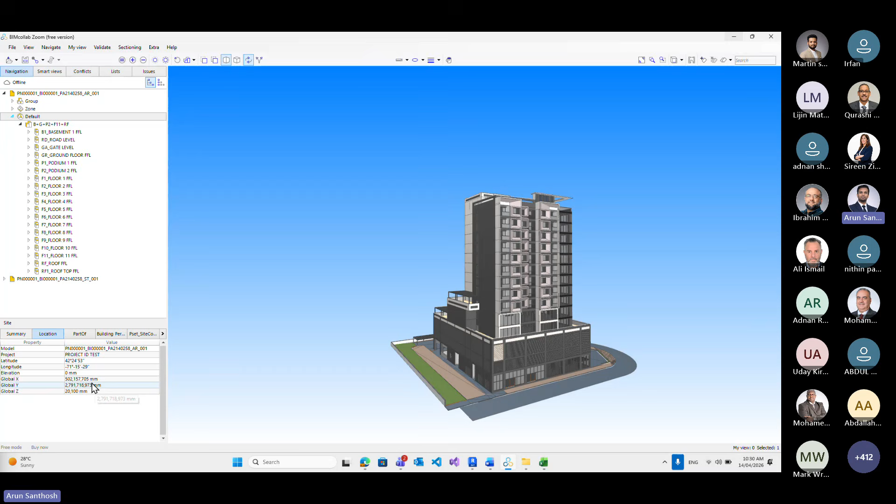Then you should check whether the building is geolocated. Using this file, go to IFC site, location. Here you can see the coordinate value. If you are exporting from Revit, the internal origin XYZ value will be here. So you can confirm here, or else you can upload the files and check it there - we'll go to that later. This way you can check your geolocation is exported correctly, or whether it went through an error while exporting. So you can confirm it from here.

Then the visualization: just have a look around your model, internal and external, make sure every element is exported and there is no error, none of the elements are missing after exporting. Compare it with the Revit, and make sure the colors are okay and it looks as per your design or not. So please go through that.

Then you have to check whether there is any proxy. So if there are any elements which are not properly mapped, please check that.

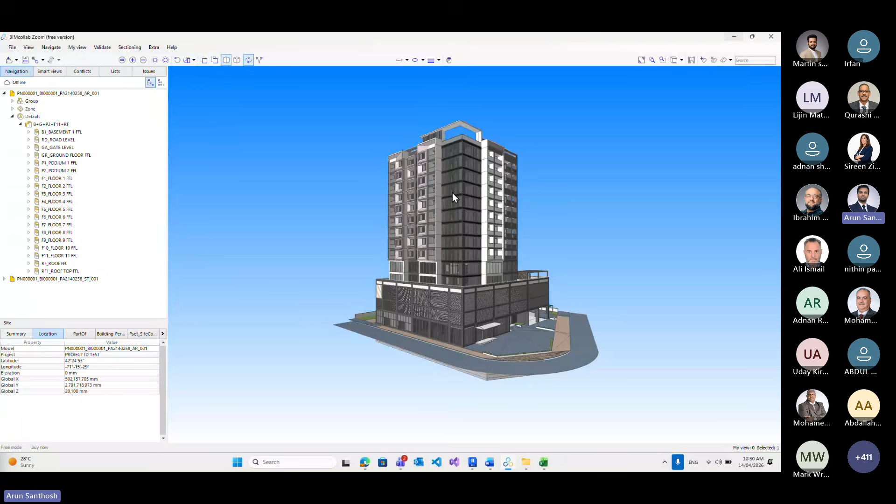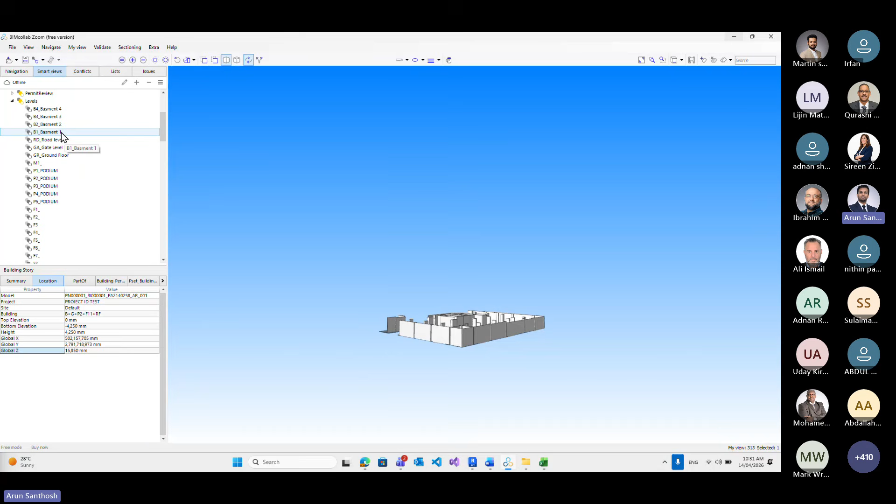Then you have to check level by level. So here you can select each level and click isolate - it will isolate the elements in that level. If you have multiple IFC files, it's not easy to go through each file, so you can create a smart view and there you can check level by level. If you create a smart view, it will help you isolate all the levels in all the IFC files. So here, if I double click it, it will open both architecture and structure with the rooms and all.

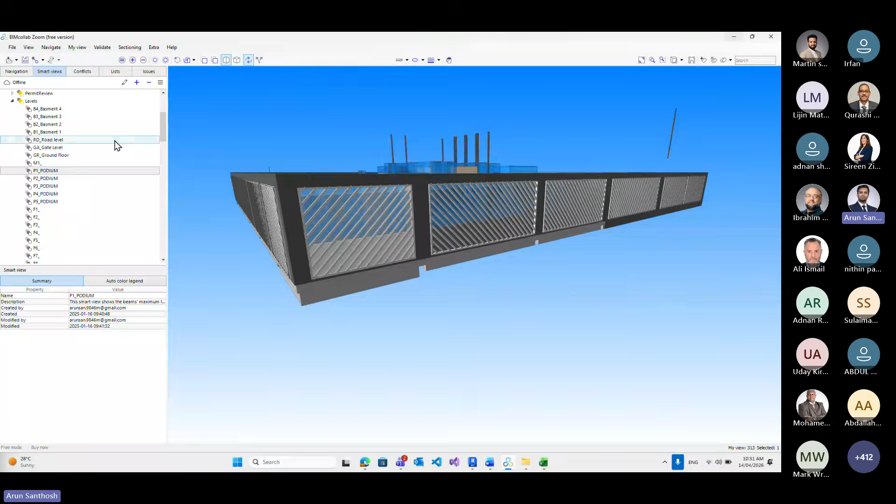So you have to check each level and make sure everything is hosted properly. Here you can see the lift cars should be in ground floor, but when I isolate podium 1, they are here. So you have to go back to your Revit and fix the hosting for those elements. Here you can see some elements belonging to the next level are hosted here. So you have to fix all those things.

So once everything is fixed properly, the visualization part checking is somewhat over. Then next, what you have to check is the quality, the information quality. First you have to check the QAQC.

You can download the QAQC application - it's there in the standard file. You can open the BIM technical question document. On page number... let me find it - page number 12 will give you the link to download both applications. So you can do the quality checking now using this application, or you can upload to a platform where you have the same tools, but for that you need to check with your submission engineer.

You have to upload it and wait for all those things, but using the app you don't need to wait. You can just download those apps - it will be a zip file. Unzip it, open the files, go back to the folder, copy the link. In the console tab, paste the location, enter, and it will process the file and give you the QAQC application.

So currently I'm running building card one. It will take some time based on the size of the building, so I have already exported it. Let me... okay. So once both files are processed by the application, the files will be available in the same folder.

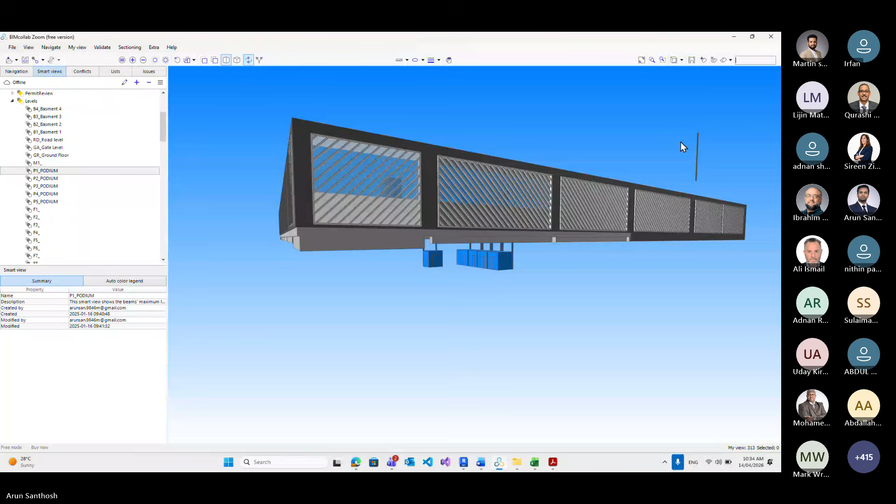paste it in the search, press enter. So those rooms are visible here. Both have some similar global ID with some caps lock and small letters difference, that's why both are isolated.

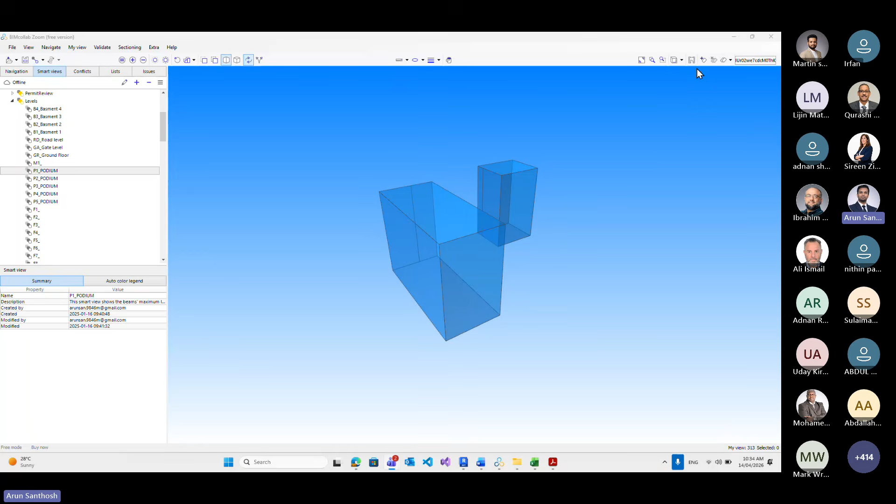So if you don't see the rooms in 3D, you can go to view and tick on the spaces. The rooms IFC space will show in 3D. Here you can click the floor plan to get an idea of where it is located, or select it.

Under the location, you can find which file it belongs to and which floor it belongs to. Then go back to your Revit file and fix the issues. So what you have to do is go through each result and fix all of them. Especially the critical should be 0. Error should be within a decent number, should not be a large number of errors.

So once you finish all those things, the next step is to generate the building card. If you still have pending errors in QAQC, please don't go to building card. Go to building card only after finishing all the information errors.

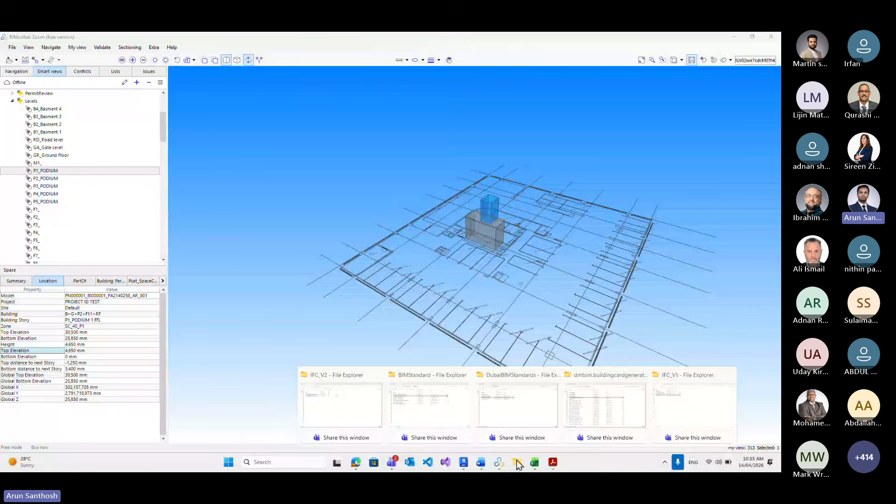So once you generate the building card, the files will be inside the temp file, in the other folder. Yeah, temp file, so it will be in a zip file. You can extract the zip file. I'm extracting it here. So open the building card summary.

Here you can see the information extracted from the model regarding the project number, the build-up area, the main usage of the building, the unit information and all those things. It will extract areas automatically from the spaces, walls, columns. It will generate the build-up area and all four types of areas, and compare with your manual calculation, and the comparison should be less than 5.

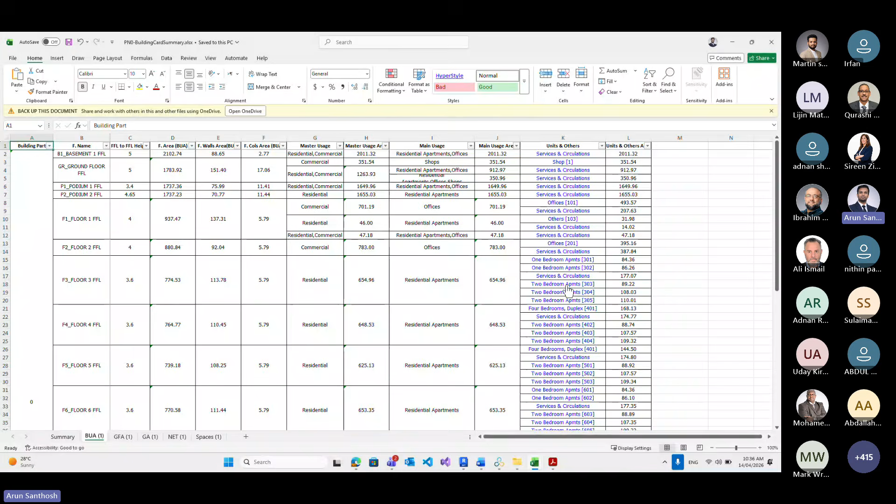In case of any issues, you can go to the second sheet and find the issues, like you can find the root cause if anything goes wrong. Most of the rooms, so apartments, will be hyperlinked over here. You can check if they are all properly linked or not. So once you clear all the QAQC, then only you can generate this.

Again, once you clear the QAQC in the platform, you can run the rule checking. I'll go to that later, about the rule checking. So make sure everything is clear, and if you have confidence that everything is good, then zip your IFC file.

Make sure the file names are proper. Select both IFC files, don't copy them in a folder, just zip the files directly. Select both directly and send to zip.

So now your zip file is ready. Now it's time to upload. Let me open the... just give me a second.

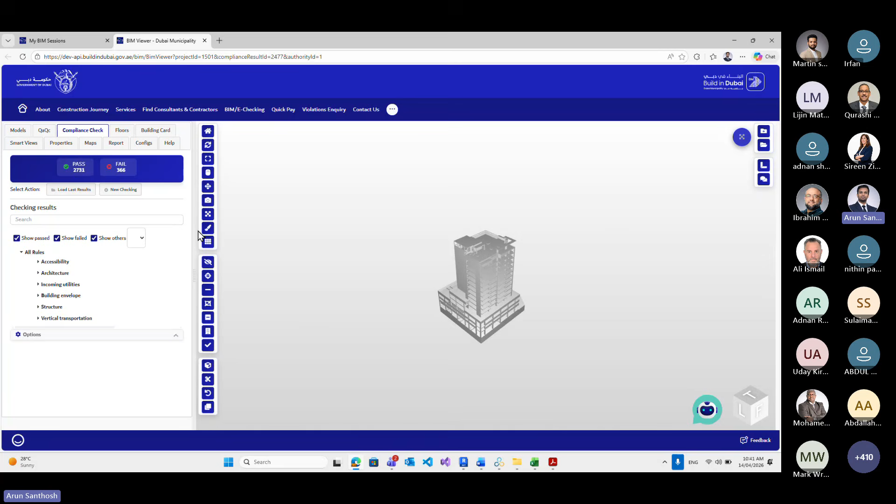Once it's done, you can click the I button, so it will open the viewer. So here the file is uploaded. In our platform, you can see there are so many tabs here. The Model tab shows the upload status and all those. Same with QAQC, the one you check locally using the application, you can generate over here. The building card, you can get it from here. The properties, same as BIMcollab Zoom - if you select any element, the properties will be shown here.

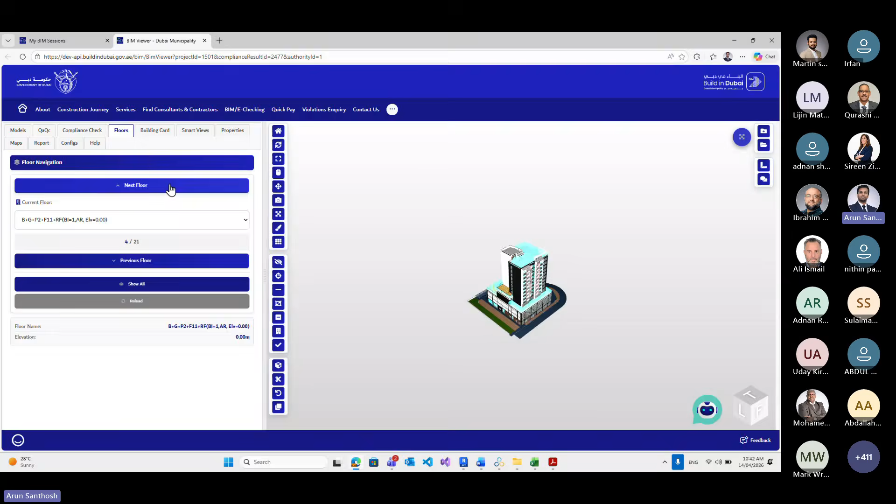The floor tab - you can load the file and load each floor. So here, you can check whether it is hosted properly and modeled properly per level. And the main thing, the code checking here. Under this tab, you can find the code checking. Let me load the result - for example, we'll check this result. Make sure you are running the code checking after finishing your QAQC process. If you have any missing information, for example the spaces don't have the codes, then your rule checking will not run, so make sure most of the information is there.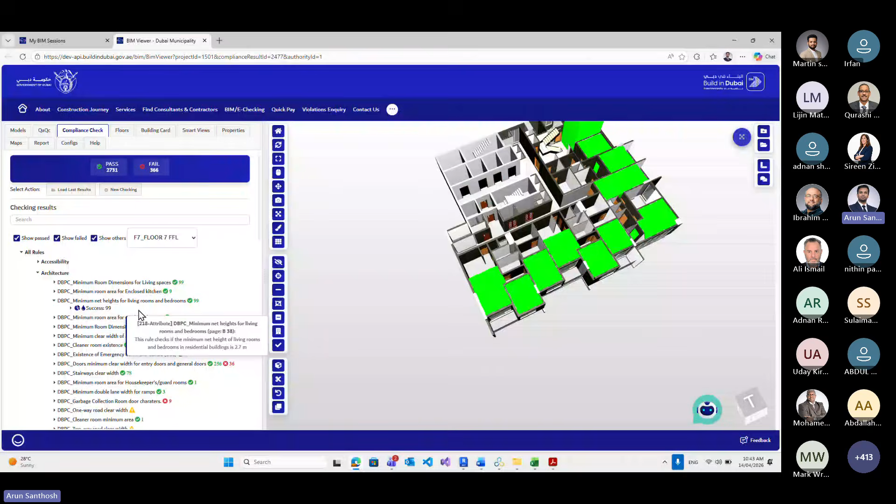So now here there are 99 residential rooms like bedrooms and living rooms. It will check whether the heights are correct. If you give color, it will show you the location of those rooms. And if you want to see it per level, you can isolate them. Here in this bar you can select each level, so it will isolate per level and locate the rooms properly. If you have red color, you can easily identify the rooms and fix your design later.

Once it's ready, even though you have some issues in the rule checking, you can definitely submit it. Maybe there will be some false positive results - you can check with your engineers who are reviewing the submission. So don't worry if you have any failed rules. Then you can go to submit. You can link the session in your application attachment - there will be a space to link the session, from there you can link and submit. So I believe I have briefly covered most of the checking things. Yeah, thank you.

Engineer Arun, is it possible to show how to make the model geolocated? A lot of people asked about it. So I told you that while showing in BIMcollab Zoom - I forgot, sorry.

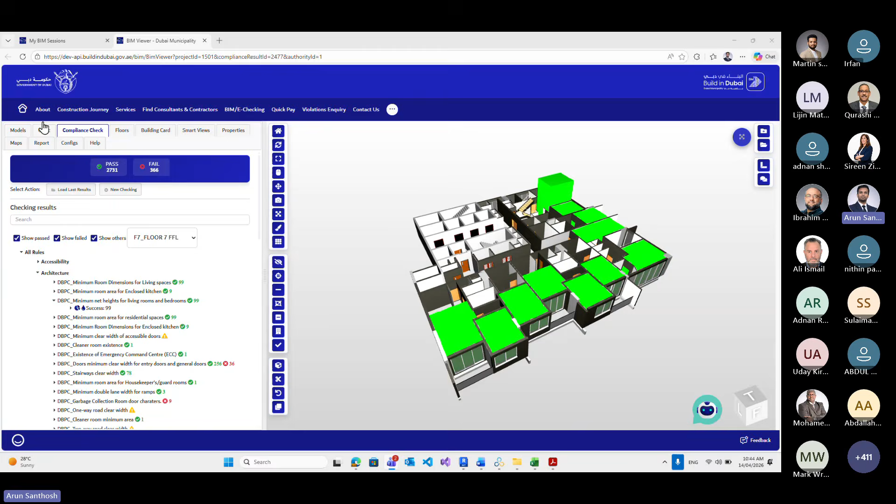So here in the tab, that is the Map tab. Here you can click setback, so it will open a new window. It will zoom into your parcel - this is the parcel which we are using now. If it's located properly and if you select each level, you can see the footprint is here. No engineer, I'm not talking about checking the setback, the steps in Revit.

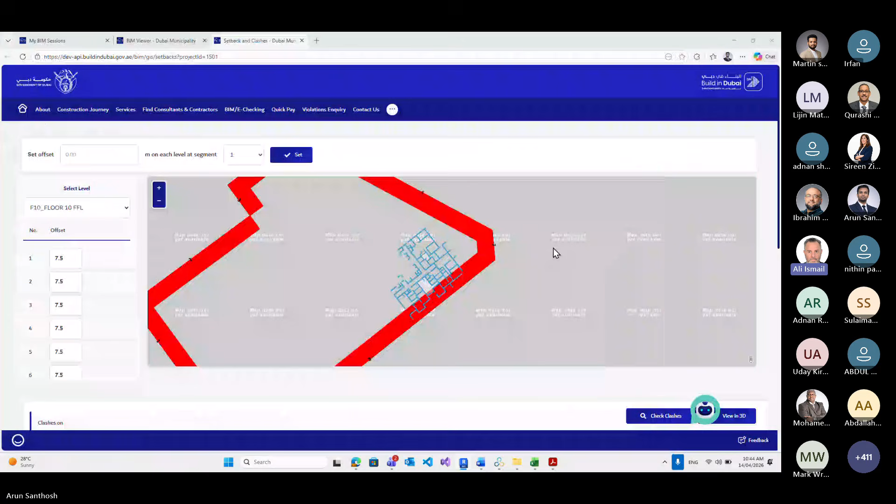If you are ready, if not, we can. Okay, in Revit, how to check? Okay, so let's do Revit quickly.

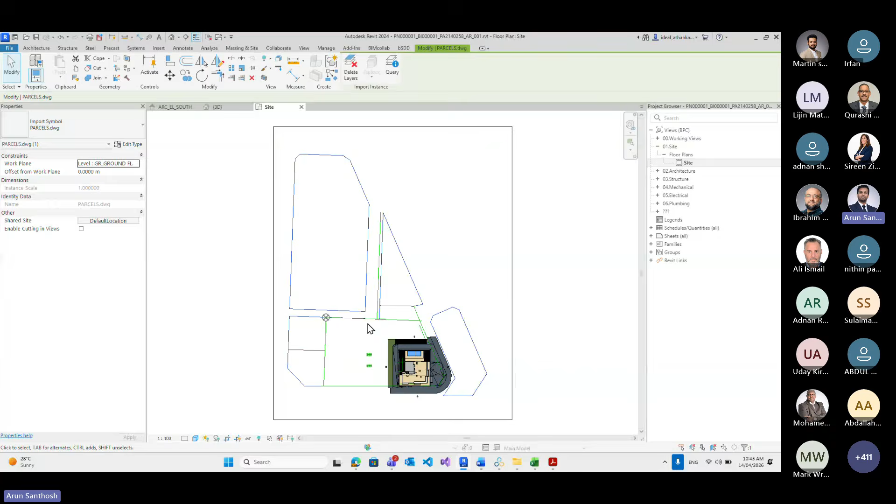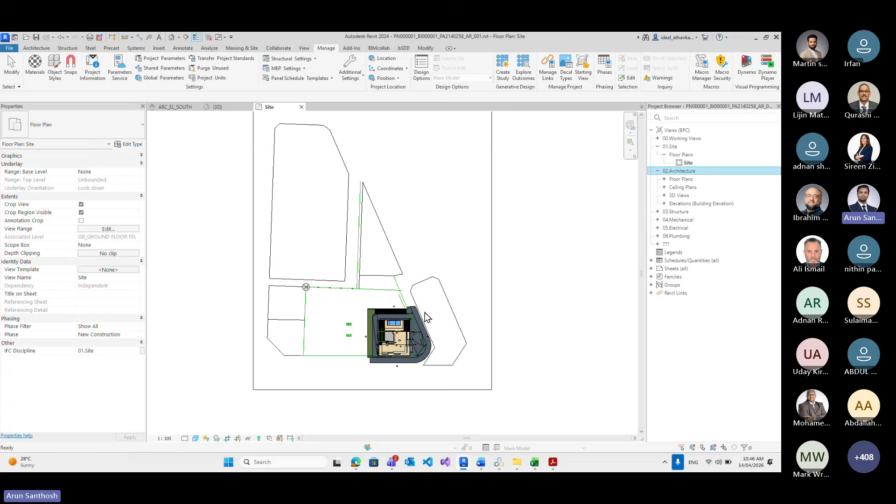So from the downloaded parcel - this is the parcel downloaded from the platform from Build in Dubai - you can link here. You can link the model to your Revit file, properly arrange the location, set it correctly. You have to do this step before starting the modeling. Link it properly, then make sure the true north and the project north are set properly. If the model will be linking in a true north rotation, rotate it to the project north, and from Manage, from Coordinate, you can acquire coordinates. Just click it and when you click the link, the coordinate XY northeast coordinate value will be extracted from the link file. And for setting the elevation value, okay, here itself I will show.

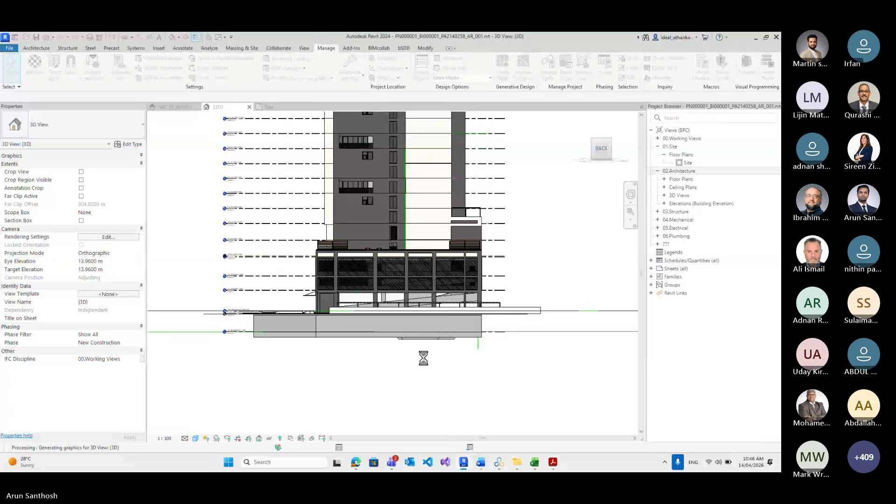So if you are considering your gate level as 0,0, it's better to go to an elevation. Yeah.

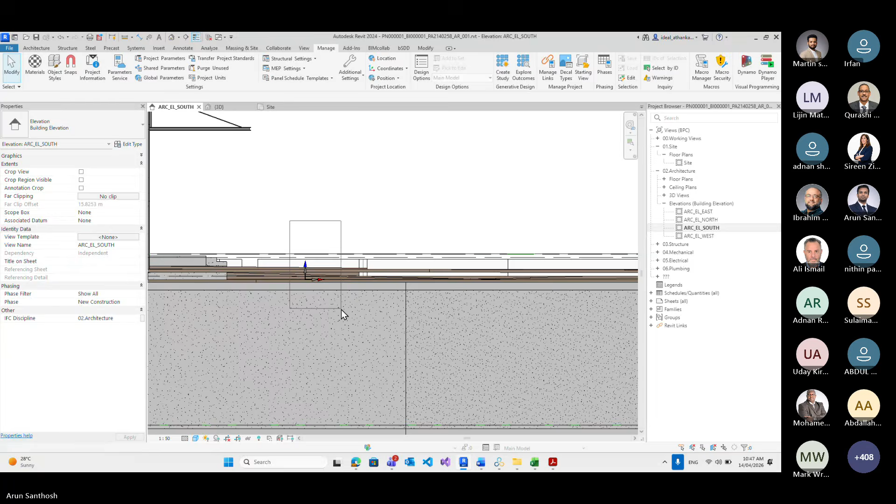I have to find where the project base point is. Okay, here, let me draw a section over there.

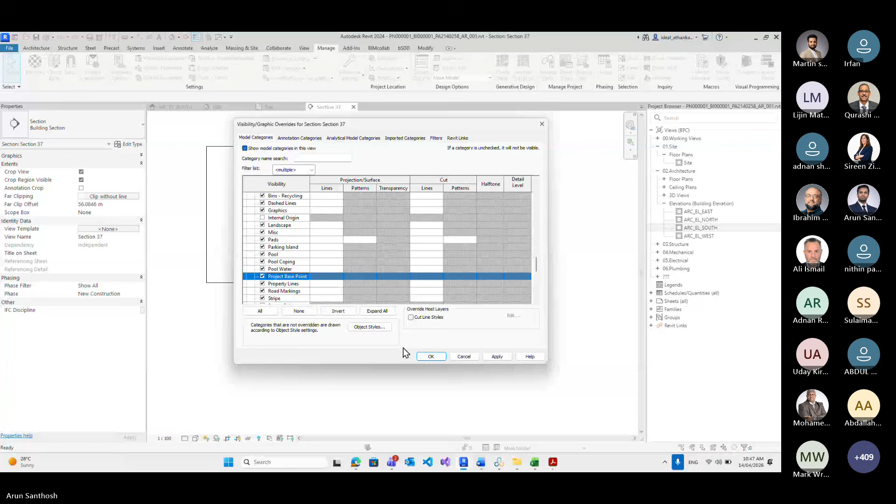So here, the project base point, you have to set it aligned with your gate level. So if you are considering your gate level as 0,0, then place it above the gate level. Then from manage, specify, you can click here and specify the elevation, the DMT value elevation of that gate level. So if you set that, then the project will be located in 3 dimensions. That means north, east, and datum value. The XYZ value will be set.

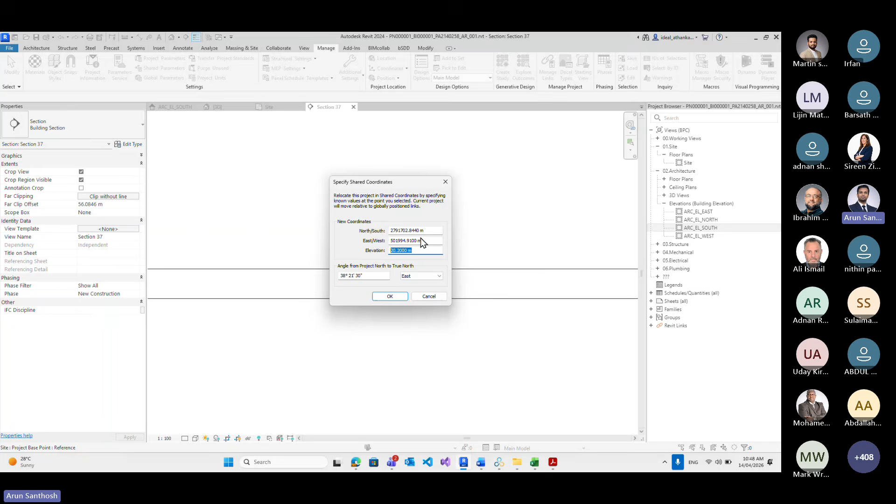Otherwise, if you just acquire the coordinate from that parcel, that parcel will only give you XY, north-east coordinate value. But the datum you have to set through specify. Yes. Thank you.

Do we have to convert the DXF to DWG first, or can we link the DXF as well? There has been a question. It's recommended that you convert it because the DXF is in a non-unit set.

You can link, open that in AutoCAD, then change the unit to meter or millimeter. Then once you clear the unit there, save it, and it's better to link the CAD file, the DWG file. Thank you very much, Engineer Arun.

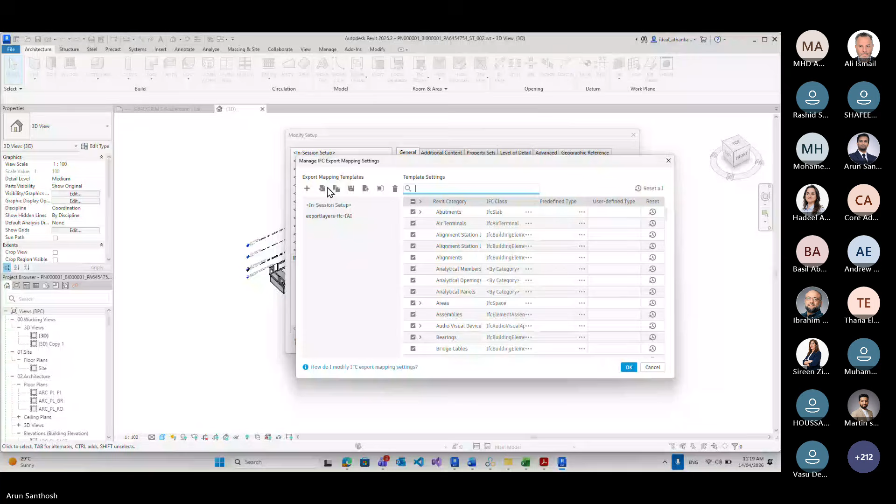So for the question Shafiq asked, go to the modify setup. Here you can see category mapping, click here, import. You can load the file here. Okay, then from the drop down, select it.

So now from 2025, these options are not in the IFC option, so it's directly here in the modify setup. Thank you.